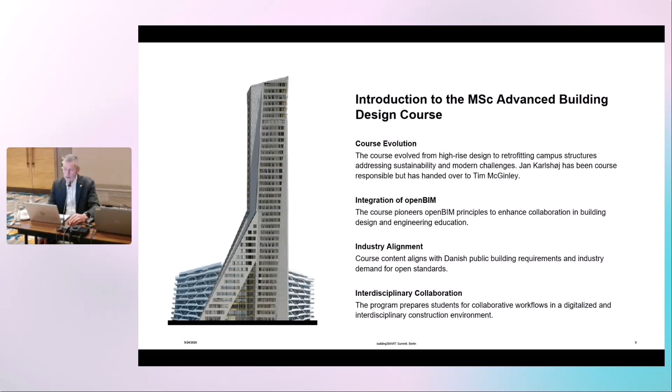And then we are aware that the industry needed some students that had skills in this area, and at that time there was some interest in high-rise building, not compared to what is happening in other places in the world, like in the Middle East and Asia, but to have taller buildings, and then we should have a collaboration between the different students working in different disciplines, and they should use digital tools.

The course takes place every year, so it's not every semester. It goes for 13 weeks, where the student has to use 9 hours per week, and then 3 weeks where they work full-time, estimated to be 45 hours per week.

They have moved from 6 to 12-15 people in a group, looking into building design, engineering aspects such as structural engineering, MEP, project management, something related to construction, but definitely also now into sustainability, which has been a role as a material manager.

And there are rules now in Denmark you have to comply with - I think it's the numbers, you really can't use the numbers. The project should be lower than 7.5 kilograms CO2 per square meter per year. It used to be 12, so it's quite a reduction. But I know that Sweden has requirements of several hundred kilos CO2, and it's really based on how you calculate this, so the numbers are difficult to compare.

For the students, the primary aspect here is that it's not a BIM course - it's a course where they use BIM tools, and they should communicate during the activity to make just one building, not one kind of building where everything fits together, not just make 6 different aspects of a building that are not coordinated.

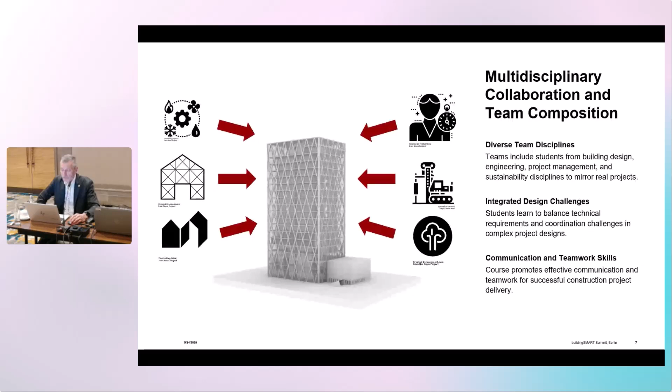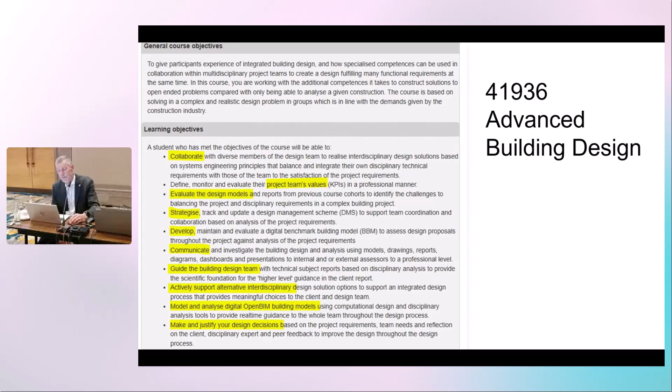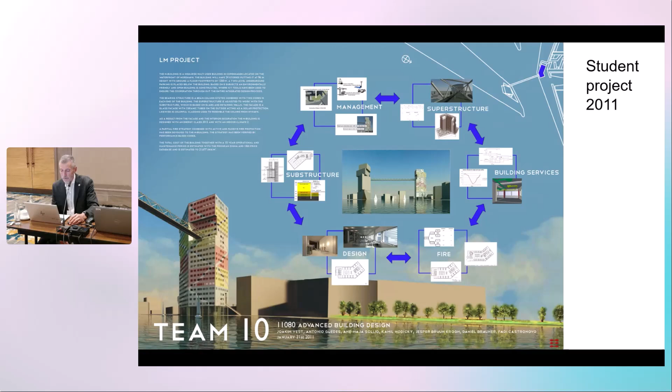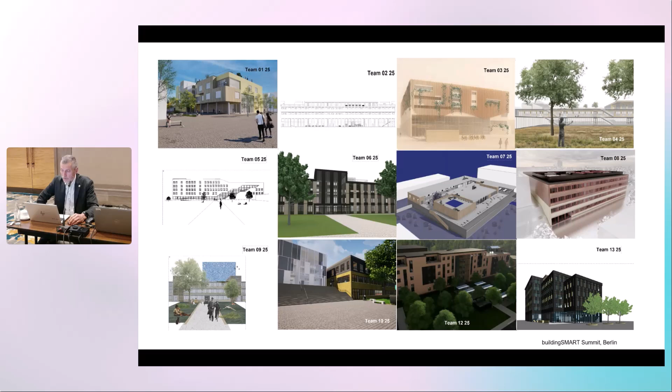And this year we moved into maybe a little bit of transforming, but using existing structures and extending them, and improving the indoor climate, but trying to use as much of the existing structure as possible. What has been done in a particular project: you have structural models, model of the foundation, building services, architectural elements as well, and often it's done in a rendered way, so it looks nice.

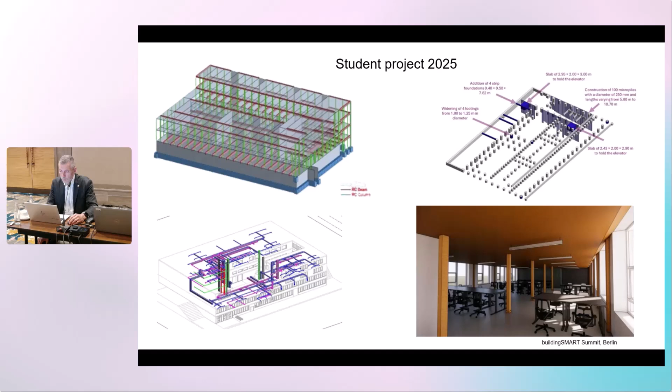Then we have students coming from different locations, and that is nice, but we also find some challenges. We have about 50% coming from abroad, and it's very different how much they know about BIM. Some are not familiar at all with BIM, and then adding IFC standards and so forth on top is definitely a challenge, and it also results in lower, not as good results as you could hope.

But they will at least be aware of the open standards that they have to comply with. Of course, there's a lot of peer learning, because some have had several courses in this area that can train those that are not having the same skills, but it's definitely caused some trouble when you have a person with a structural background from another country who sees very limited benefit in using BIM, and only wants to concentrate on the structures, not being sufficiently aware of the coordination and the need to deliver BIM models in a specific format.

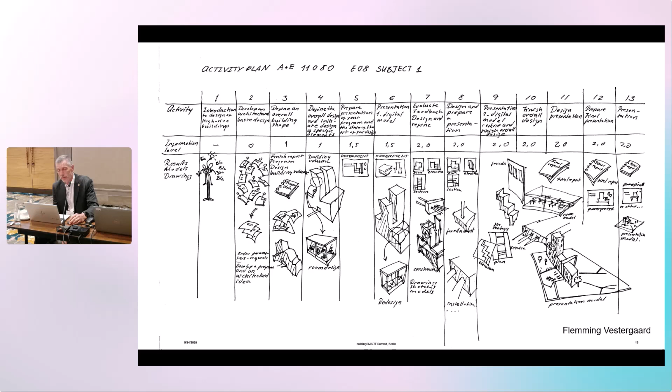About the software and how it works, we have no requirements for which tools they're using. We only have the requirement, like in the government's requirements, that you have to deliver IFC files. So they have to choose their own software.

Some people are using AutoCAD, Rhino, SketchUp early stage, and then move to BIM later. A lot are using Revit, a few are using ArchiCAD. Some start using ArchiCAD, but are forced by the rest of the team to move to Revit, and very few students are using Tekla.

They are using a platform provided by the software vendor where they can share data more or less in real time. That's one of the benefits they can have by using this platform, whereas with IFC you have to make an export, import into another tool, and so forth. That's seen as a barrier.

Depending on the models, how they're made, how skilled you are to make models, how you divide the models and so forth, it can really be time consuming, depending also on the hardware, to handle IFC files. So that's also a burden. So they tend to wait to do the IFC export until near the end of the project. But there's definitely a need to do this as early as possible, and often it's too late to start the process of integrating.

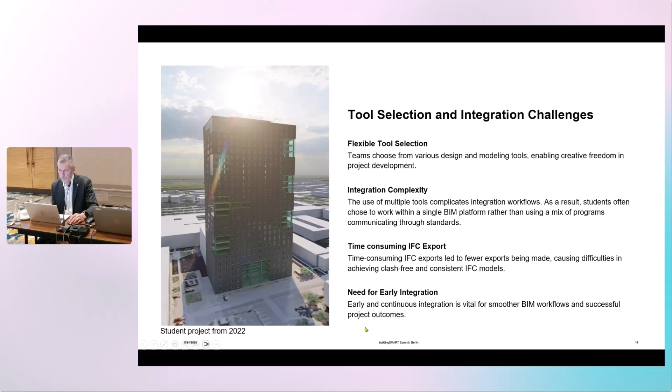We have introduced Speckle for better solutions for real-time or almost real-time access to different models, and that has been a success. But it also means that IFC is not used for doing this real-time collaboration.

It's also, of course, a different setting when they are sitting at the university. Some are working from home, but they only have this project, they have no contracts with each other. It's a different setting than in a company where you have to do maybe more projects sitting at different locations.

But they appreciate being able to use Speckle and see a limitation in the IFC workflow for real-time collaboration. So I very much welcome the ideas of IFC5 to have a more flexible way to work on an integrated model or shared models, to share it during the process and not have to use file-based exchange.

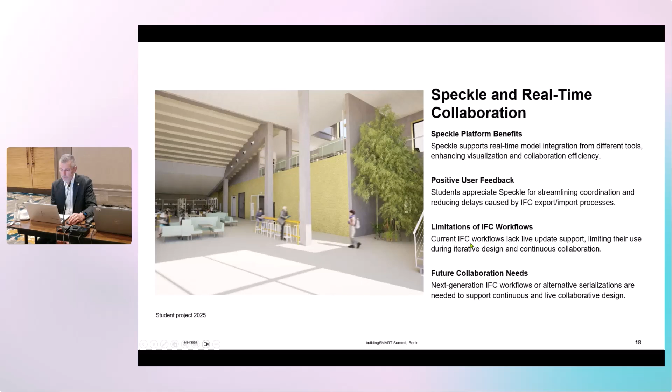About the standardization, some are using IDS, some are very skilled in using it, but the rest of the team often has problems, so it often fails. BCF is sometimes used, but as the students are co-located, they often prefer to just talk together, which can be fine. But there's no track of what has been happening, and if there are issues later, they can't identify who should be doing what. They prefer face-to-face.

Some in practice are using BCF, a number of companies are, but there's a gap here. So from our side, we have to do more. If we want students to use IDS and BCF, we have to make it mandatory.

Then the software, as I said, people are mainly using Revit. Revit is highly used in Denmark. Many of the students have worked in architectural, engineering, contractor companies, so they will use what they see there.

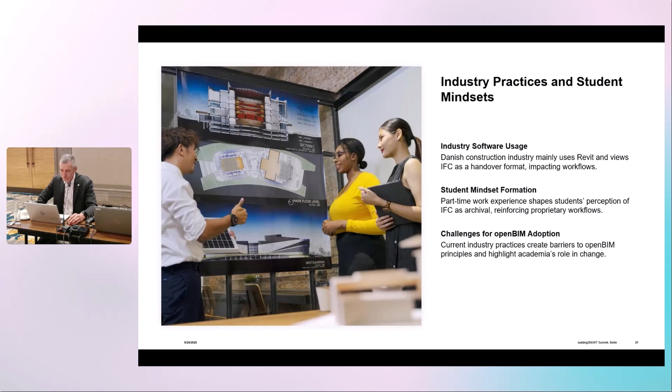What else is being done at the university? In this course, we have had about 1,500 students going through. We also have other courses, of course, at undergraduate and master level, and I can show a few images from there. The undergraduate students are introduced to BlenderBIM and Bonsai, and master level students are introduced to IfcOpenShell.

For most of the courses, they focus on FAIR data, which might first be introduced in research, but the EU is having quite a lot of focus as well. I think it's a nice acronym - FAIR is findable, accessible, interoperable, and reusable.

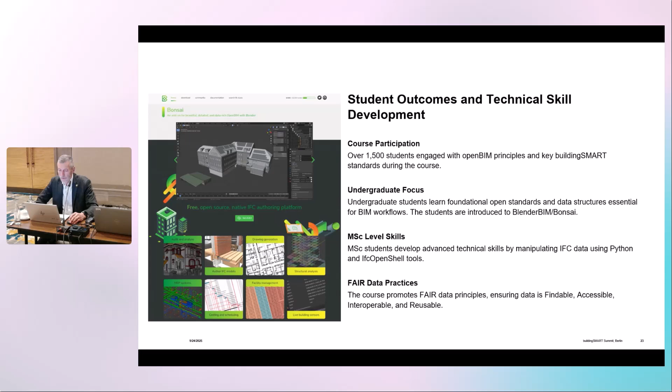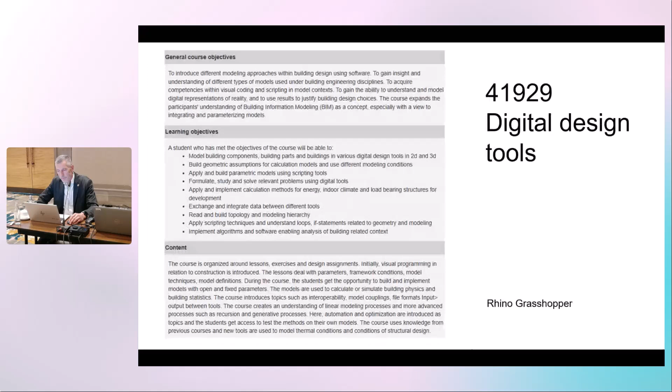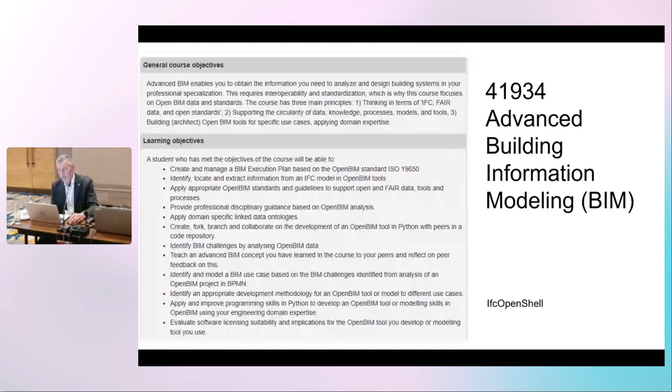There's a course at the university at entry level in Revit. There's another one using Rhino and Grasshopper, but then it starts to use openBIM, and it can move to an advanced level where students actually make programs in IfcOpenShell. Here there's an example where a student has collected some elements and added CO2 emissions from each element, calculating how much emissions are from each element. This is not a tool, but it gives students an awareness of what is possible with openBIM, and a tool like IfcOpenShell where they can make tools themselves.

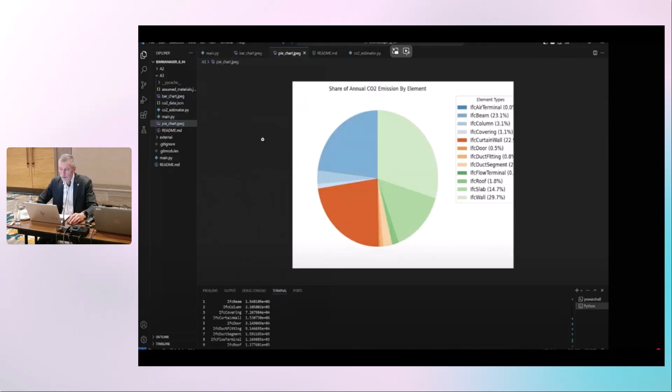So the lessons learned: there's great potential, but also limitation in doing collaborative real-time work. There's a need for better support for the students, but also in general how to use the open standards. I see fair data becoming very important in Europe - at least I hope that will happen - and I see IFC5 will enable real-time multidisciplinary collaboration.

And then I think it's important, which is why I decided to make a presentation here, to have strong backup. I hope there will be support from people within this community to push both educational institutes, but also to push educational institutes from industry to make people aware of the open standards.

So I think it's important that we teach openBIM in education, and not be lazy and just choose one product and one platform to use for all courses.

And I see a need for a new version of IFC if we want to do more collaborative real-time work. We have been experiencing that a tool like Speckle can help us have this more dynamic access to the model.

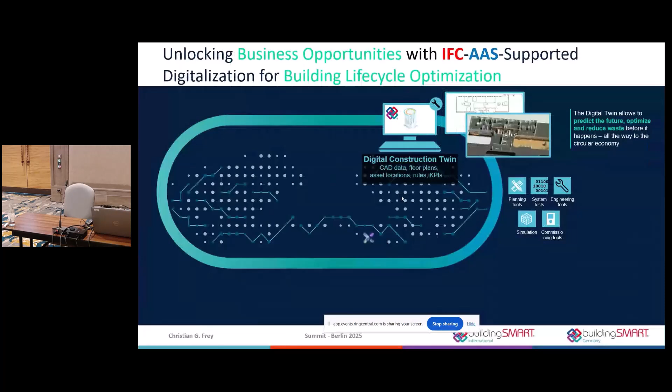Short repetition about the digital twin. On one hand, we have what you all know, the digital construction twin, which describes the building in IFC wall, IFC ceiling, and all these IFC elements. This is the standard, but this is not all. The building needs much more. It needs products.

Products are getting more and more complex, especially when it comes to technical building equipment, and these products need also a description. That's why we need the asset administration shell for.

At the end of the day, the BIM model, the IFC model, and the product description is just static data. But what we need in the operational phase is dynamic data. So in order to do this, we bring it together, and I call this the performance twin.

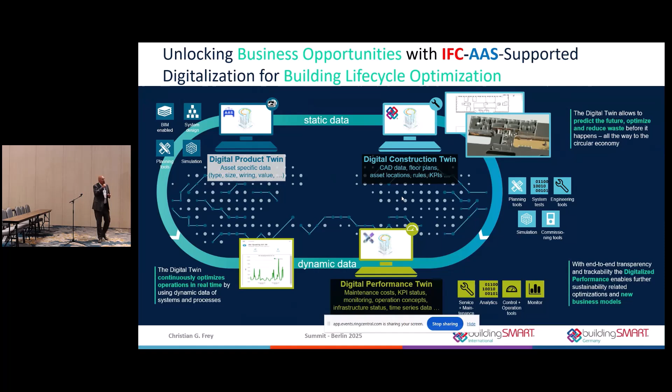So why do we need it? Because 80% of the life cycle cost of your building is in the operational phase. So if you want to do savings, you better save them here, because you have a higher impact.

When we look at traditional projects, we always see a gap, a loss of information between design and construction, and also from construction to operation. I think it's even deeper.

Now if we follow the BIM process 19650, I think we can do a better job, because we have the common data environment where everybody has access to the same information, and you can also use it for later on.

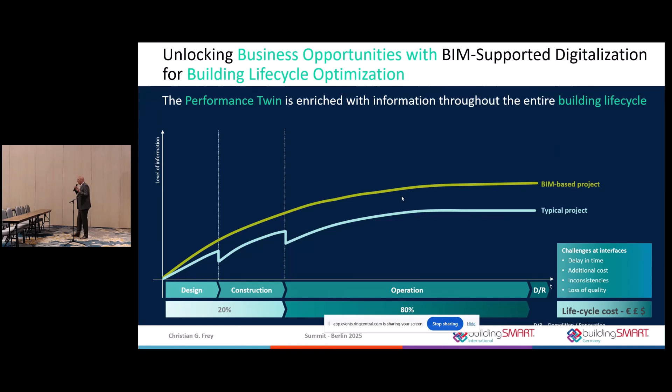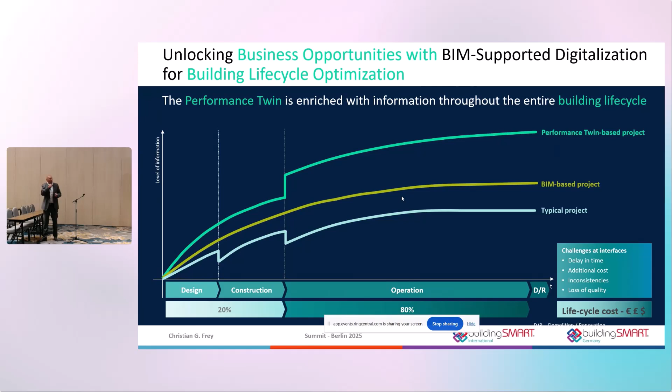I think we should already increase this with the operation, so that we have the performance twin, where we have a leap already on information that we get directly from the beginning, because we can use the asset administration shell. How this will work, I will show you later.

What you see here, just for the explanation again: we have the IFC, which is a skeleton, which is the building, and we have also the AAS, which I call the nervous system of your building, of the technical building equipment.

Bringing this together, and this is the cool thing, you get the information not only about the asset, but also where it is located.

So if you have, let's say, 1,000 smoke detectors in this building, you have the exact location of each smoke detector when you click it in the model. And with this, you get the real information, the live information from this location.

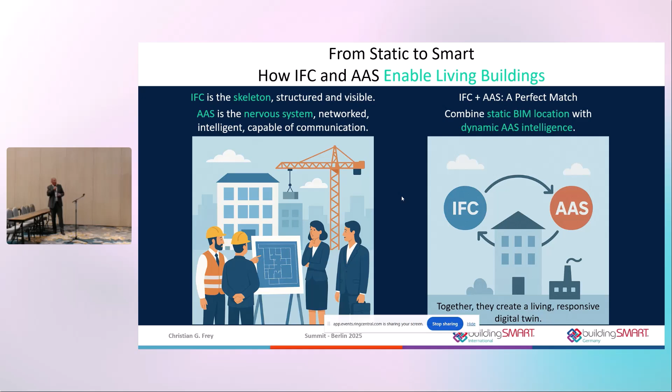This is what the asset administration shell is based on: existing standards. So we use for the semantic, for example, ECLASS. For the transmission, we have Web of Things, we have OPC UA, and all these standards already exist. So there's nothing new, it's just that we use it.

On the left side, you have this digital nameplate, the documentation, carbon footprint, real-time data. These are called submodels. So the asset administration shell is based on submodels that are defined as a template, and that you can fulfill with your manufacturing data.

Next to this, you also see on the right side this simulation and advanced 3D CAD data that you can use for your service or commissioning personnel, in order to give them deeper information than what is needed for the standard.

Again, the asset administration shell is an IEC standard, so it's nothing proprietary, it's open. You have a type. So you start with a type in the planning phase, and as soon as the asset is ordered and installed, you have an instance of it.

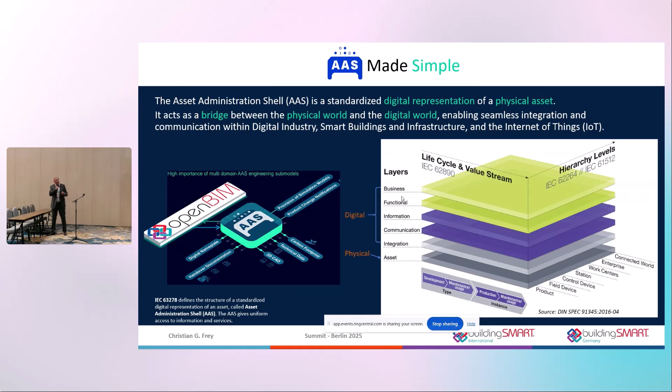As you see here, you have also your physical asset, and based on this, you have the link to the physical object via the AAS. So the AAS holds the information about your physical object.

And the good thing is, you can also use it for your digital product passport. So you have a matrix code where you identify your product in the field, and then you get all the information that you need for your digital product passport.

And we call this a DPP 4.0, because this is an invention coming out of, or the system coming out of, the industry 4.0. And we use it also now in the building industry.

And the good thing is, this is not a GS1 code, so it's license free, it's an ID link. It's also standard. And then you get all the information that is legally required for the digital product passport by the EU regulation. Next to this, you have other submodels that you can use to create new business cases in the operation, or also to improve your commissioning time and all this stuff.

Because this is exactly what the problem is: you have a lot of information, and then you hand it over to your facility manager, and what happens? He's looking at this stuff, but he doesn't get what he needs.

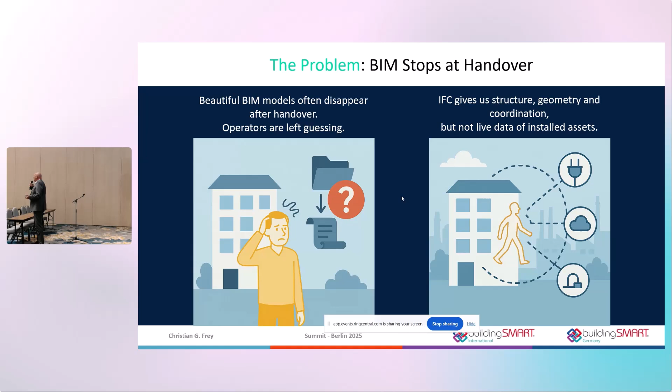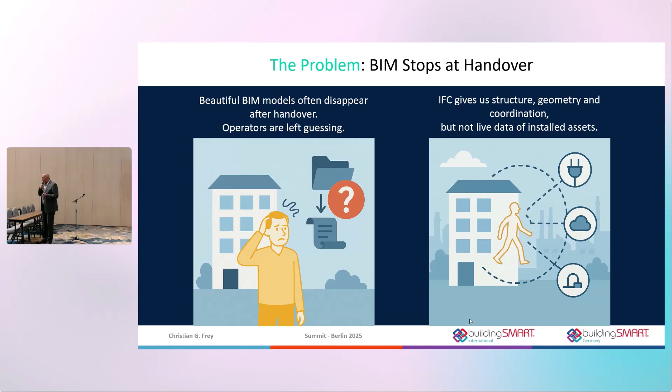And that's why we say we have to bring this together, so we have the coordinated information of the asset: where are they installed, where is the location, and when you have found the location, what are, for example, the maintenance manuals.

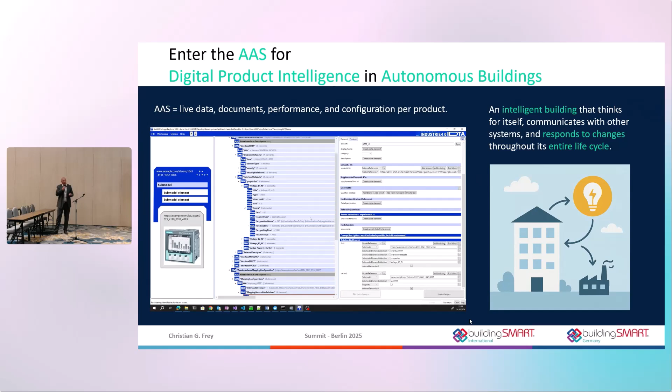And then you can store this data, doing historical analysis, see when something is running out of the standard. And for us, this is important for autonomous buildings. We need all this information because a building is getting more and more complex with all these sensors we have inside, with the operational phase, with reducing energy consumption, all this stuff. We need to have this data in order to increase the performance.

Another advantage is, you see this presence detector. And my example is always, how can we use AI in this field? The thing is, this presence detector is installed in the toilet. When you enter the toilet, you go in and the light goes on.

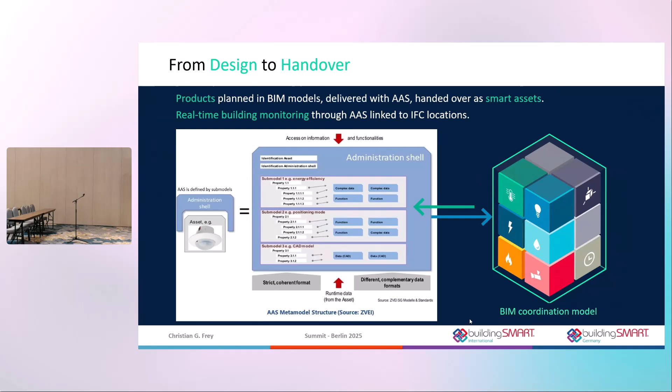To make this happen today, somebody has to sit down and program a controller. So input one of the controller, which is the presence detector. If it goes on, you have to switch on four outputs for the lights. This can be done by AI because you have the location and we have a space, in this case a toilet, where the AI finds this presence detector and it finds the four lamps. And it knows exactly by wiring where the controller is for this.

And it does a pre-programming of the controller even before commissioning. And that's why, what you saw before, when I have this leap in my performance twin, this is exactly how we start. We start optimized already from day one, and not struggling around finding all these things. Where are they? You know all these problems.

Okay, so this is a big advantage to have the asset and the location, and based on the location, we can retrieve more information and do more things, especially with AI now coming up.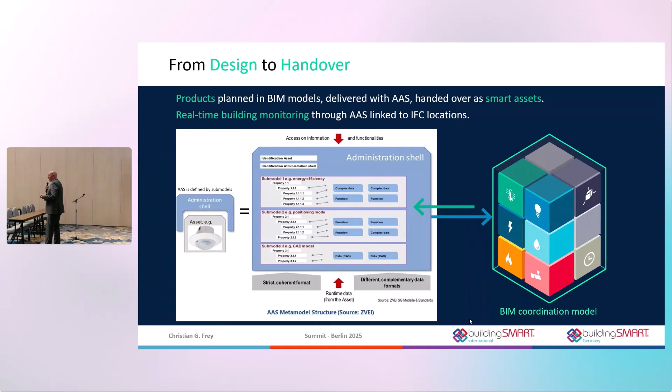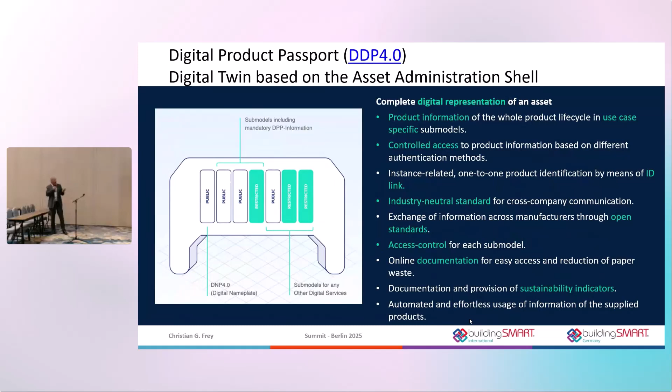Again here, a bit more details on the digital product passport. As I said, you have your digital nameplate and your identifier, which is not GS1 in this case. As I said, the ID link is open source. It can be provided by IDTA, which is the host, actually the standardization organization for the asset administration shell.

It can be hosted by you as a manufacturer of the product. So you are not forced to use a GS1 code here.

Now, from the process, how does it work? We have the type data that sets a requirement. It can be in the IDS, where you say, I would like to have a presence detector, I would like to have a temperature sensor, I would like to have this and this. But you describe it vendor neutral. That's what I mean with type.

And when your ERP system is going to order the product, then it becomes an instance. And with the instance, you have the serial number, you have the version number of the firmware, for example, and all this stuff.

And then it goes into the runtime, and you see here from the IFC data, I call this a slim BIM. So what I would like to see is that we can reduce the BIM model to the necessary objects. And in many cases, IFC space is enough. I don't need to know about the IFC wall or IFC ceiling for the building operation. IFC space is good for me.

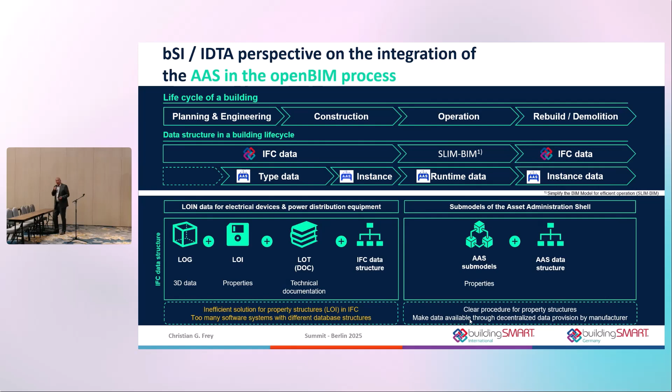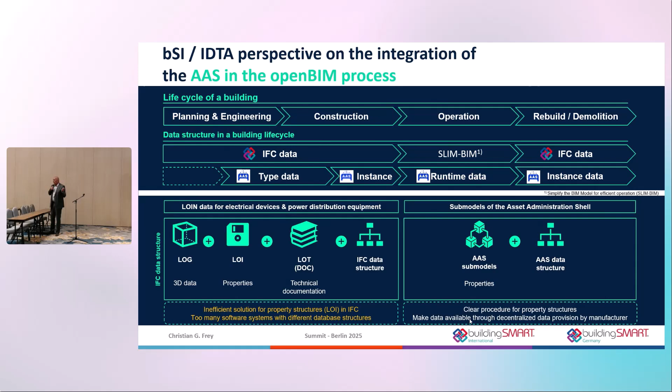And what's also cool for rebuild or demolition, you also have now your instance data. You know exactly what you can reuse of your product. With this, you may be able to reduce your carbon footprint, because if you can reuse, let's say 80% of the product, you may reduce it already in the beginning. So that's the idea behind it.

And we started with this. You see, there is a cooperation agreement between the IDTA, the Industrial Digital Twin Association, because the industry looks much more on performance than we do in the building sector. So we started this agreement not even a year ago. It was signed by Clive at this time, and the managing director of IDTA, Meik Billmann, he was also here on Monday. And we started working.

And the interesting thing is, it's all open source, okay? You don't have to rely on any proprietary or vendor lock-ins or whatever. It's all open source. You can use it, you can modify it as you want.

And as I said, we started working, and already in December, not even 3 months later, we had the first guideline on how to bring IFC and AAS together. We did a review, a new version came out in April, and there's also an English version you can download for free on the IDTA website. On the buildingSMART website, buildingSMART Germany, you also have the document you can download for free, called Leitfaden, to get a deeper understanding on how IFC and AAS come together.

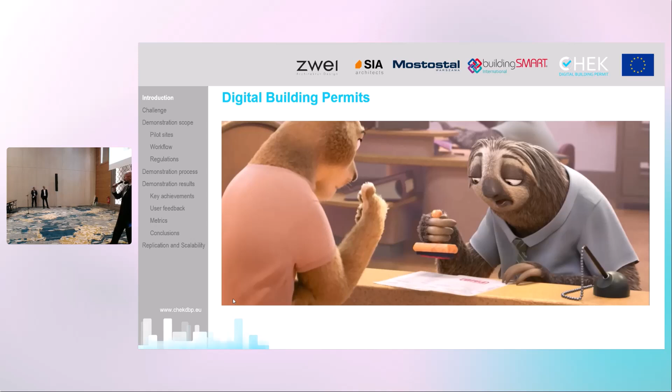So now I would like to emphasize that the CHEK project is not the only one conducting development in this area. We have two ongoing other projects, Accord and DigiChecks, just to show you that there are other consortia that also make research in this topic.

So I would like to start with the challenges that we face. At the beginning of the project, we made brainstorming with our partners from the municipalities, and we defined the following challenges.

First, currently we have a manual process. This means we rely on traditional paper-based workflows, which are often slow and inefficient.

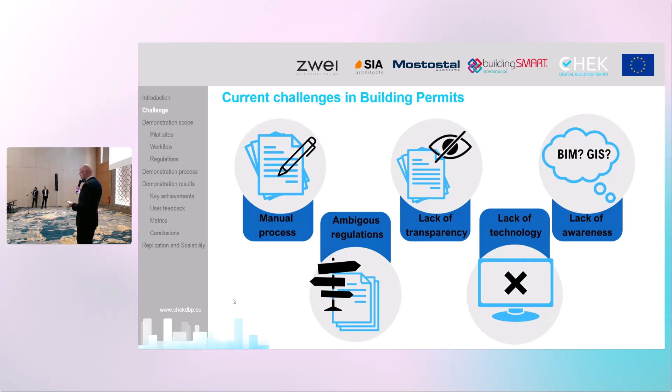We also think there is a significant lack of transparency. The process can feel like a black box, making it difficult to track the status of the application or understand the decision-making process.

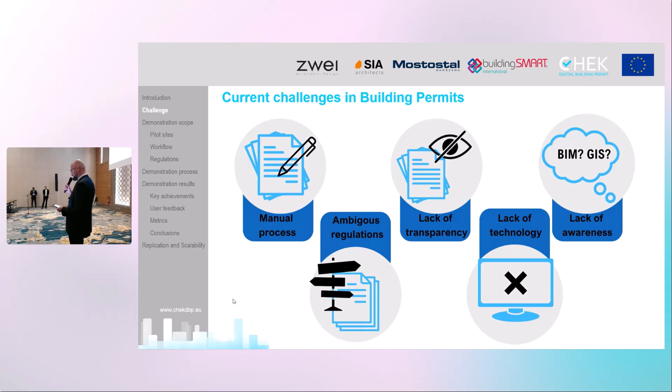Furthermore, there is a lack of technology. We don't have the necessary software or tools to streamline and facilitate the entire building process. And finally, there is a lack of awareness about the possibilities that modern BIM-based processes can offer to make their life easier. I'm talking about the workers from the municipalities and all partners involved in the building permit process.

A few words about the different perspectives between designers and municipalities. The designers, acting on behalf of the investors, aim for efficiency, so they want to submit the minimum amount of documentation and get approval as fast as possible. The municipality has a different perspective because they have to take care of safety and regulation compliance, so they expect well-organized and well-prepared documentation to properly assess the projects.

However, both sides would like this process to be very quick, because for the designers and investors, the goal is to save money. And for the city, it's also important to grow the city and have this process run smoothly.

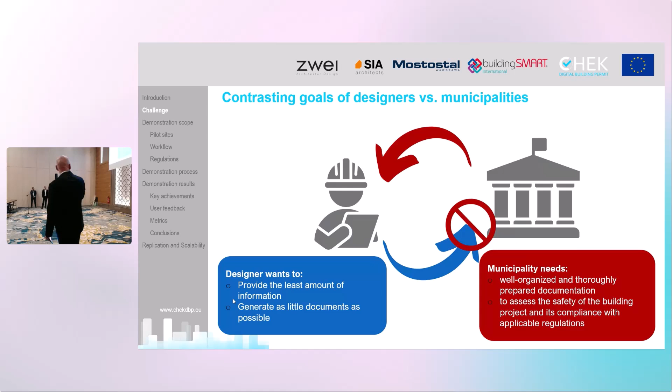These are the challenges we had in our project. At the beginning, it was very challenging to define the process in different municipalities with different building regulations. And at the end of the project, it was very challenging to test all 11 software tools with different workers from different municipalities.

Now you can see our demo buildings. These are the real cases that were involved in testing the tools. And now my colleague Borja will talk more about the technical aspects.

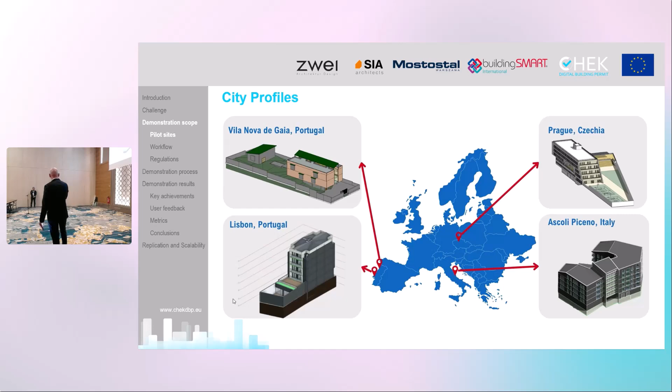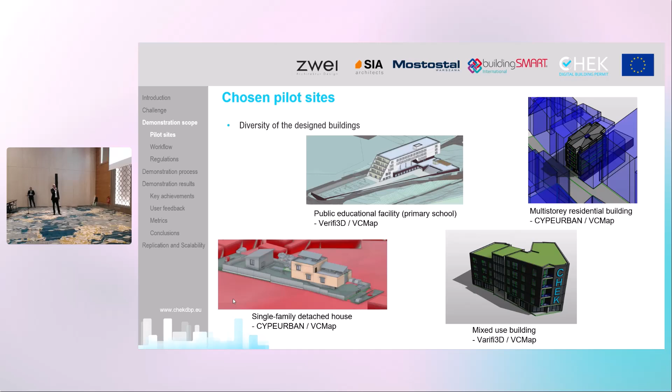Thank you, Peter. Well, in this project, we developed 4 pilot cases with different types of buildings and surroundings depending on the municipality, from a public educational facility to a single detached family house, a multi-story residential building, and a mixed-use building.

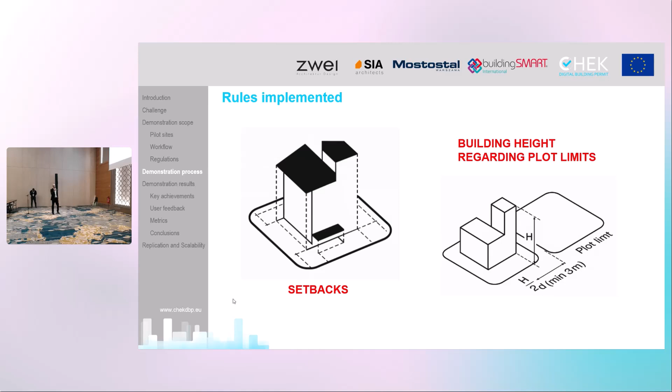We have implemented several regulations with different levels of difficulty and different approaches depending on the software. In this case, we are seeing setbacks and building height depending on the limits of the plot. Another two examples: here we have the number of required parking plots depending on the building, and the height of the building depending on the surroundings.

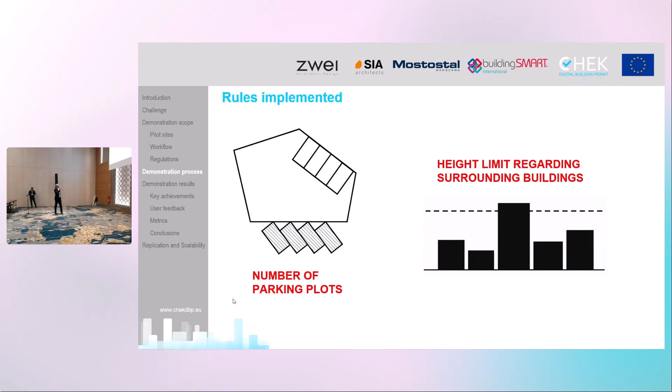For the development of the tools, we have used several types of data: graphical data, parametric data, and we have taken into account the surroundings or context of the buildings. Two more examples: the building height in terms of maximum number of floors above ground level, and the buildability index. I have to say the CHEK toolkit is open and scalable, letting developers implement more regulations defined by urban plans.

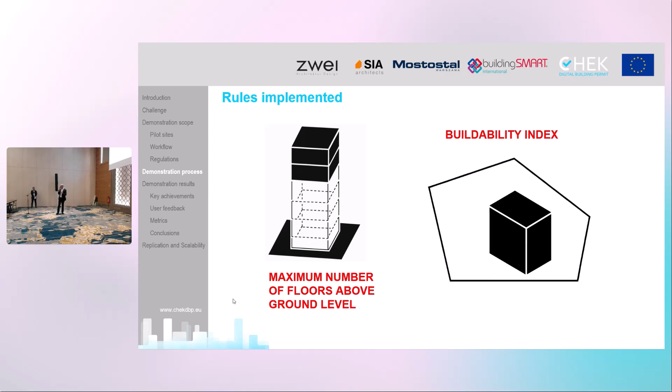During a period of 6 weeks, we worked hand in hand with the municipalities of Prague in Czechia, Lisbon and Vila Nova de Gaia in Portugal, and Ascoli Piceno in Italy. After working with them, we got valuable feedback from the users that gave us very important information to improve future developments.

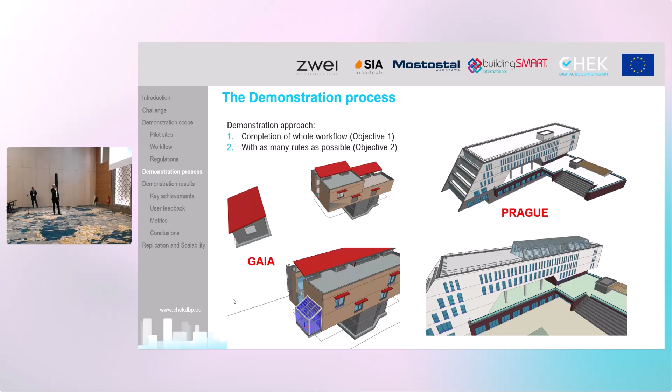In the case of Gaia, we added a new volume to the building. In the case of Prague, we also added a new volume at the rooftop. For Lisbon, we extended the backyard to add a restaurant. And for Ascoli Piceno, we included a new volume at the top to include a gym.

We repeated the whole workflow with the municipalities, with 4 pilots and with the 2 scenarios. So we repeated it 8 times.

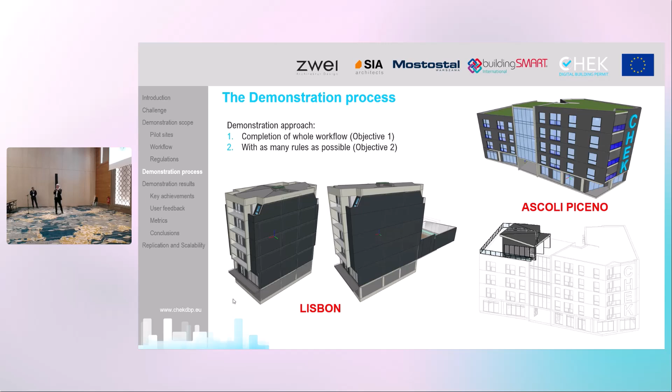Going deeper into the tools, this is CYPEURBAN. This is a BIM-based tool. It works standalone, you have to install it on your computer, and it's designed specifically for designers, so the municipalities will not work directly with it. It needs IFC files, you federate them, and as a designer you will need to create auxiliary graphical elements.

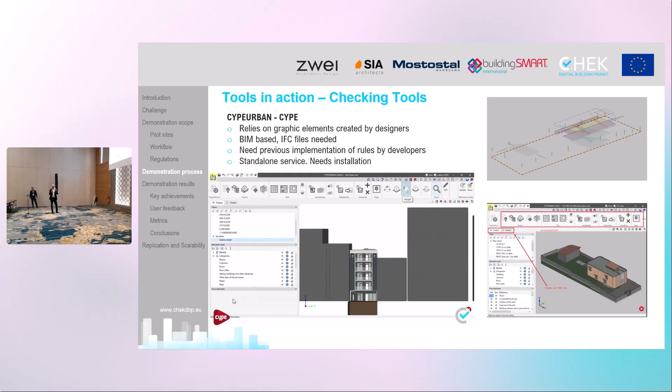I have to say that the regulation must be created in advance by the developers. The same for VCMAP, regulations based on IDS format must be developed in advance by the developers. In the case of VCMAP, this is a totally automatic checking tool.

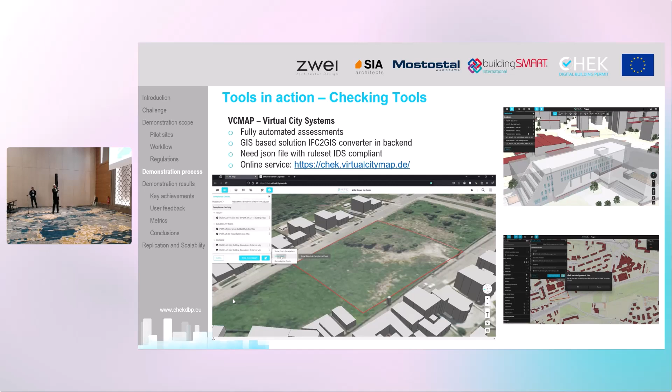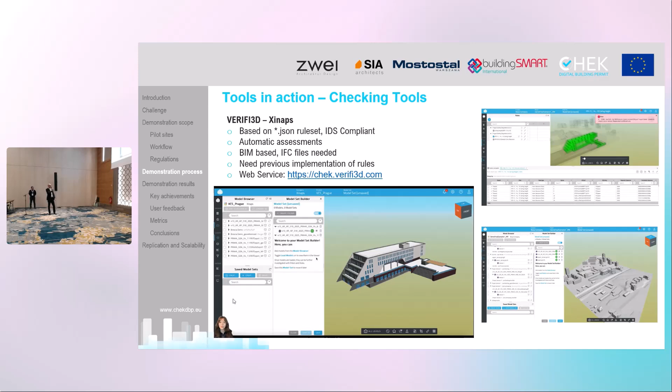And it's web-based. In the case of VERIFI3D, developed by Xinaps, this is another IFC BIM-based tool. It also works on the web. You can see the URL there, and you need to implement the rules in advance before doing the automatic checking.

And these are the auxiliary tools. We can see the converters, both from IFC to GIS and the reverse. The conversion from GIS to BIM is made by RDF, and the opposite, BIM to GIS, is a tool developed by TUD. You also have both tools, IfcGref and VCMAP, to check the georeference of the plots.

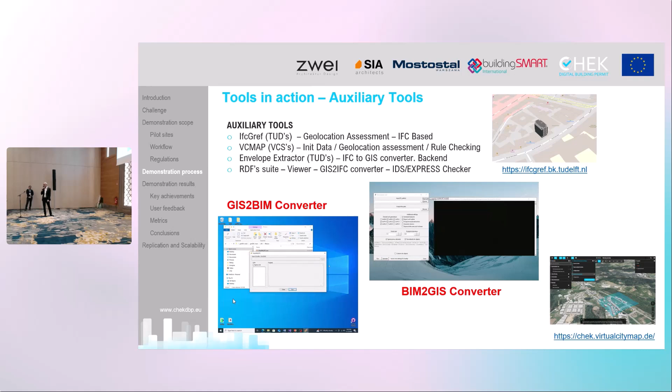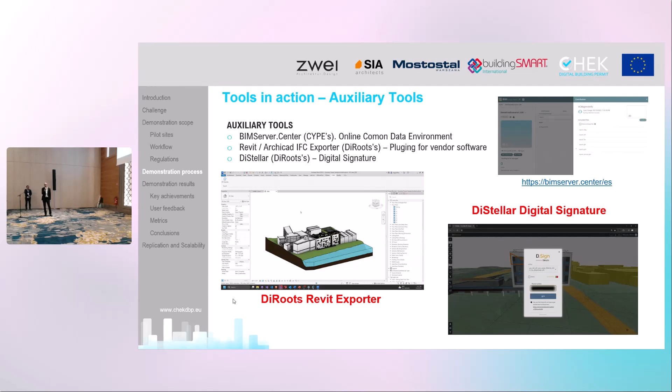Finalizing the presentation of the tools, you have Exporter, which is a plugin you can install in Revit, and you also have the DiStellar digital signature to sign the IFC files. And with this, I finish. I give the presentation.

Thank you, Borja. I will do it this way. Okay, I'm not that technology advanced. Sorry about that. So it's okay.

Thank you. The core purpose, the most important goal of the CHEK project was to provide a digital toolkit in order to support digital building permits, and I think we greatly achieved that goal, as we tested it, and here are the results.

The key achievements of CHEKdbp are that we validated the proposed CHEKdbp in a wider context, a wider environment, meaning we had 4 municipalities in various parts of Europe, with various legislatives. We also took into consideration 2 scenarios: new construction and renovation.

Also 4 building types. Then we exercised end-to-end the CHEK digital tool chain, meaning we validated the whole steps involving these digital tools. What is very important is that we didn't run just a lab demo.

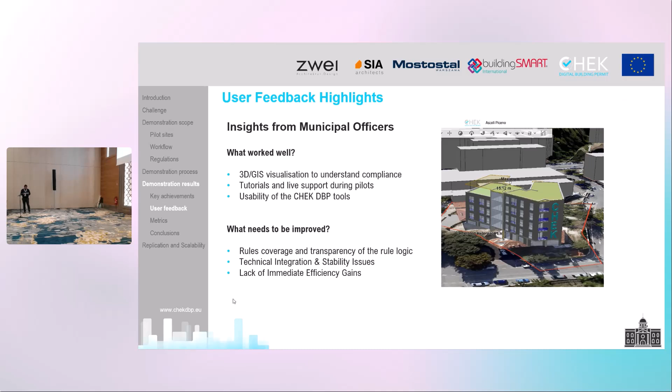At the end, the lack of immediate efficiency gains were not that easily recognizable, but that's because of the various limitations that we had in order to make CHEKdbp more mature. Regarding the designers, we generally

reported more or less the same feedback. What worked well? We had clear IFC expectation, which means in advance we knew very well what we need to deliver. Also, the possibility to do the pre-check and self-check of the models were very precious, because we were in a position very early in the design process to see what is causing errors to our model, and also to correct the errors and to submit finalized models which were of high quality. What worked well also for us is the simple visual tools that supported efficiency.

What needs to improve? We reported more or less the same feedback as municipal permitting officer, so I will not repeat that. Please, next.

Regarding the metrics, we had some problems to collect the metrics like we should, because the data were very various, let's say, but the strong KPI metrics that we relied on were time savings and error reduction.

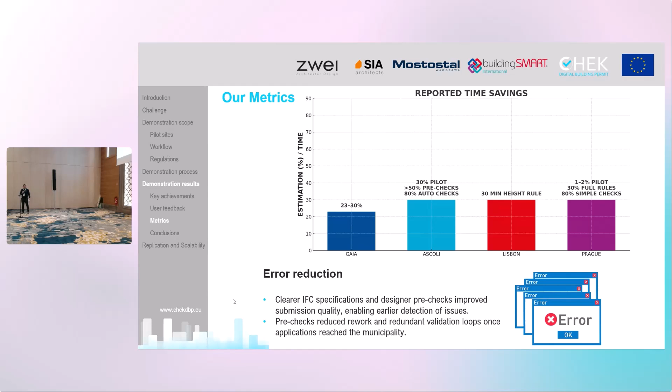Regarding the document simplification, we tried to put a lot of requirements into BIM models. Our aim was to have somewhere between 50 and 70% at the beginning of the project, but the numbers that we received ranged from 30 to 60%.

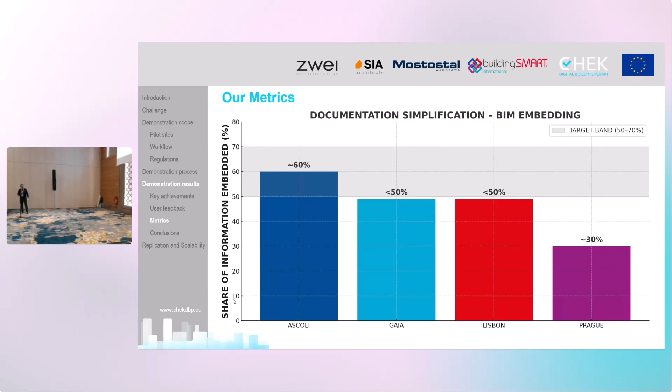And one of the reasons why the numbers are like this is because usually legislation in various municipalities has some limitations and specifics on external review. For example, there is a strong demand for 2D drawings, 2D documents, and completely other reviewing steps when submitting for a building permit.

Next. Regarding the rules performance, we had very high numbers, but unfortunately we didn't get above the 95% KPI. The percentages were from 70 to 90, and the reason why is because we had a limited number of rules.

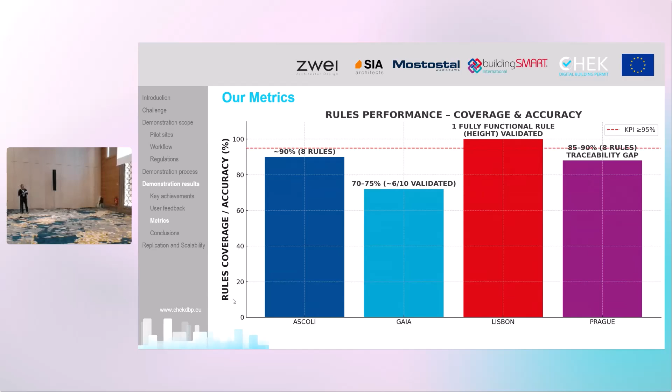Please, next. We also submitted feedback about the code checking applications like Virtual City Map, then Solibri checkpoint. We had a very democratic approach in this case from the very beginning because we used not one, but three different checking software, each with different strengths and maybe different approaches.

And this is very important and proved to be beneficial for us because we used three companies with different visions on how to solve the problems. During the demos, all three applications complemented each other.

Please, next. So as a conclusion, what we can say at the end of the demonstration process: first of all, we proved the feasibility of the CHEKdbp workflow, which is again model-centric, based on openBIM standards. During the demonstration, we also saw some gaps that hinder production use, which means additional activity needs to be taken into consideration if we want to bring CHEKdbp to a more mature level.

There are a couple of very important issues that have appeared. For example, in order for everything to be checked for building permit, that means that BIM models need to be fully detailed, and that may be a professional load on the designers' side because they will have to put everything inside the BIM models. And as I said, sometimes that is not possible due to some legal limitations.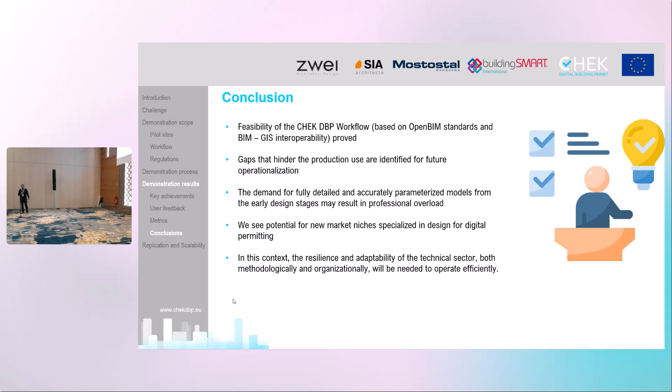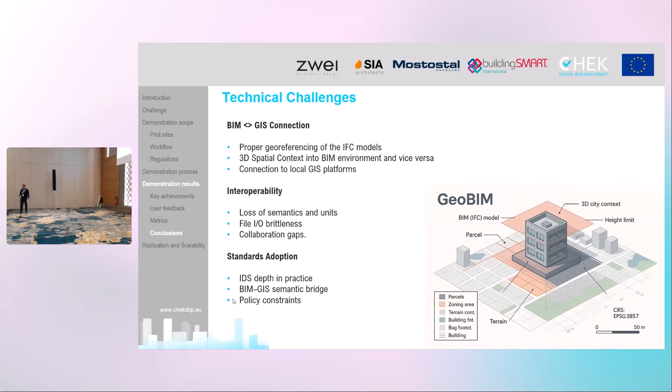As I said, we use IFC as a submission backbone. That standard is very mature and played very nicely in our case. IDS we used as an information requirements gate, but we have a recommendation that it would be nice for this standard to evolve from just checking the presence of certain attributes to checking basic correctness, at least to supplement checking of the models and checking of the rules.

We did validation of the Express schema. Also, we used the tool IFC Checker, again produced by RDF, that functioned very well.

Regarding feedback and our constructive proposals, it's very evident that we need an IFC standard for the regulatory domain, because that will make our life much easier. Not only our life, but it will make digital building permits more effective and more realistic.

As I said, the IDS standard needs to evolve further because it's not taking into account geometric constraints, and there are also some other limitations regarding the attributes.